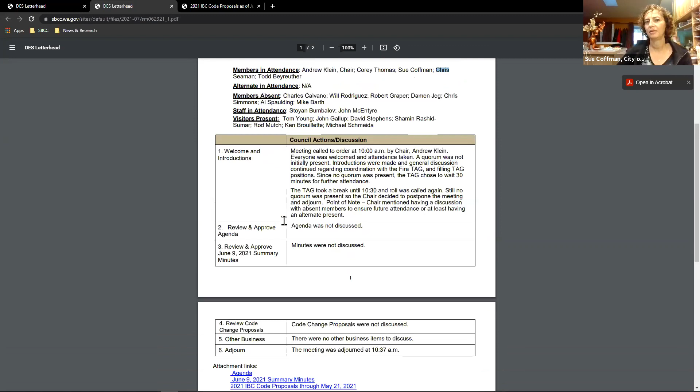Any other mods? I move to accept the meeting minutes with the corrections as noted. Thank you, Sue. I would second. All those in favor, please say aye. Aye. All those opposed? Motion passes.

So now we get into the fun stuff. Todd, you had emailed me about your code change proposal. Do you just have the one down here with the thicknesses for CLT? Yeah, that'd be it, thank you for entertaining it. Okay, yeah, let's do that first, and then we'll go down the list. If you've got specific ones you want to get done earlier or later, even if you're a member of the public, let us know, we can probably be very flexible.

Okay, all right, are you ready, Andrew? Let's have John pull that up. Which one are we starting with? It was 63. GP 1-63.

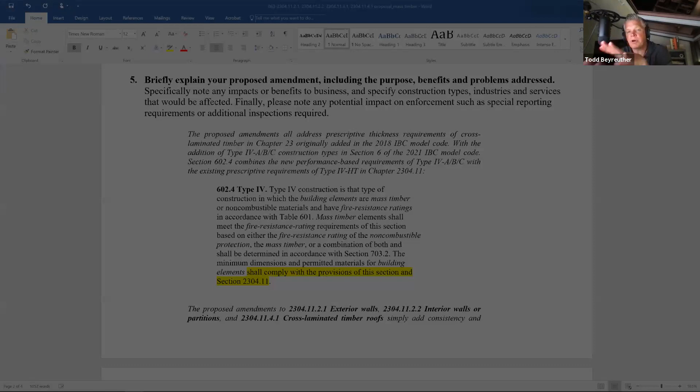Backing up a little bit, the need for this is that, and I've tried to do as much due diligence as I can with members on the ICC, on the tall wood building ad hoc committee, with AWC and other building officials in the state, no one can give good justification or remember why. So if anyone was part of that and has more justification of why this wasn't addressed, the best I can get is that they didn't want to deal with it.

During all the other actions that were taken, members are taken. So the need for this, to get to the point, is that by not allowing down to 3.5 inches, it eliminates common metric sizes of 90 millimeters and 100 millimeters. It also blocks out some other mass timber types, such as nail laminated, dowel laminated, glue laminated, that would use standard 2x4 stock. So I'll stop there if there are any questions or initial comments.

Okay, thank you, Todd.

Todd, this is Chris. The only thing I can think of would be heavy timber. All the types of construction with heavy timber kind of assumed to be 1 hour or so, right? I don't know if you're aware of any fire testing on the nail laminated stuff or the dowel laminated stuff that's 2x4 nominal lumber. Has it been tested? Do we know that it's equivalent-ish?

The short answer is, if we were going to take a technical approach, yes, and it doesn't change performance requirements in Chapter 6, or eliminate the opportunity to—and obviously all these manufacturers are doing their fire testing anyway. That said, the justification proposed here is that it's equivalent to or exceeding what you see in 2304.11.3.2: sawn or glued laminated plank floors, 3 inches nominal in thickness, covered with 1 inch tongue and groove flooring, or 1/2 inch structural panels.

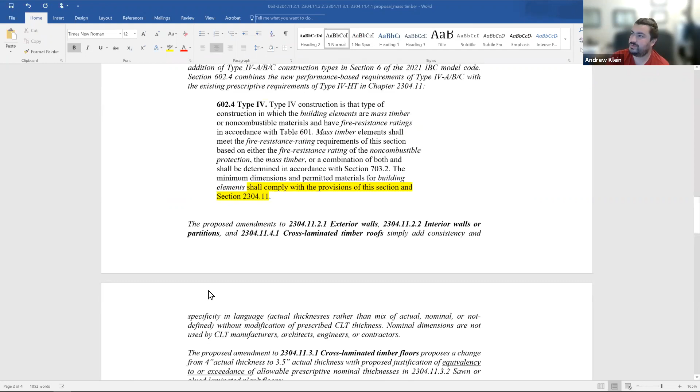Yeah, that's my opinion, but... Okay, that's kind of how I see it as well. So.

And would you like this more liberal, or is this what industry wants it to be? Well, this is coming primarily from my representation on the manufacturing side, that this is blocking out, without further justification of why it's 4 inches actual, a lot of products from both North American and European manufacturers for this requirement that it shall be 4 inches.

Todd, on... sorry, go ahead Chris. Oh, I was going to say that section is specific to cross laminated timber. That one is Mass, absolutely. Yep, and so it wouldn't really impact dowel laminated or nail laminated, correct? Yep, yep, yep, okay. I'm just using that as an example. Oh okay, cool. Yep, cool, but that's absolutely correct, that this section specifically is CLT only.

And Todd, this wouldn't create a situation where only a single manufacturer would have this product, correct? No, not at all. In fact, because right now what it's saying is, and you know how these committees go, right? I wasn't there back when PRG 320, which is the standard, was originally established, but there was 1 or 2 manufacturers, there were lumber people in there. They said, of course it's going to be made out of 2x6s, right? And probably not a lot of consideration for metric sizes, European sizes, or that anyone in North America would take that leap and start cutting rectangles differently from circles.

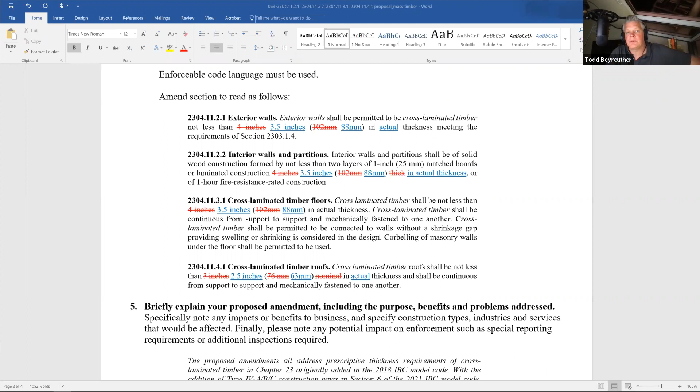Again, if it cleans it up for type 4, A, B, and C that are already given performance requirements, and it doesn't change for the IRC or for type 4 HT, then that's probably fine too.

But Chris, did you want to amend your motion or keep it? Oh, I didn't move anything yet, but I'm ready to, I guess. I don't know, go ahead.

So Todd, what would you prefer, do you think? Would you like to move the 3 forward and not the 1, or would you like to just add a be-open-minded, building-official-friendly note there?

Probably the latter, if those are the two options. Or just whatever the process would be to say we need additional work at the committee level.

I'm okay with whatever Andrew thinks makes sense there, and I'll put whatever that is into words.

Let's punt it for the committee level, Todd. That gives you more time to think about that and come back instead of putting you on the spot. You've got a couple different paths forward there that accomplish what you need, as well as keep some of the conservatism we already have with thicknesses.

Would you be all right with that? Yeah, I just thank you for the discussion. That's really raising the question, and then I'll do some work for the committee.

Okay, so I don't know if we need a motion, John. Well, we will need one—sorry, John, to cut you off—but we need to understand how to file it for the standing committee.

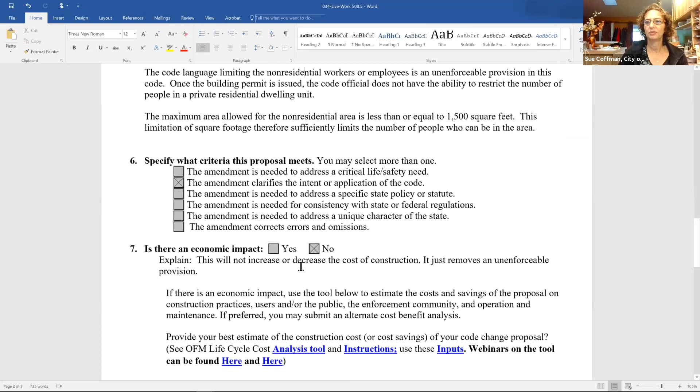Well, again, occupant load is based on square footage, so the restrooms - you could have a cafe for a live-work. There wouldn't be anything preventing you from that. In fact, that's sort of the whole concept of live-work: people used to have their little shops or coffee shops, little restaurants, and they used to live in the upper portion of the unit. So I would say again, there's no need to restrict the number of workers or employees in the code, because there's no way you're going to enforce it anyway.

So you're enforcing it with your square footage. And if the square footage is such that your occupant load is a certain number, based on how the use is, it's calculated based on square footage. Yeah, I guess I was just getting at, if there was a live-work unit and it changes tenants, they don't need to come get a permit from us for a change in occupancy, because it's still just live-work. It's R2. No matter what they do in there, it's still R2.

Not correct. Change in use requires a permit. So if the use was still just R2 retail and I was changing it to a coffee shop, then I would be required - it's not a change of occupancy, but it's a change of use within the occupancy category. So yes, you would need to get a permit. Okay.

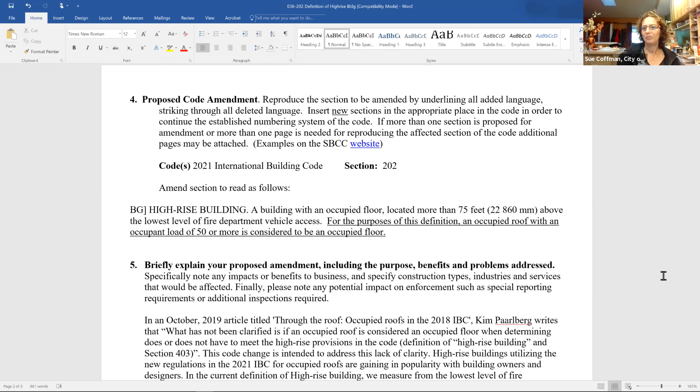There's a lot of proposals in for the 2024 codes at ICC. Some proposals say any kind of occupancy of a roof would trigger you into a high rise if that level was at the high rise level. This one is 50, I think I've seen one like 200. We think this is the Goldilocks number, an occupant load of 50 - it's a reasonable number, not a lot of people up there on the roof. Having 49 people up there would not trigger an occupied floor, which would not make the building a high rise.

So I've got one question just for discussion, and I'll preface it with: I hate slippery slope discussions, so maybe my concern is not valid at all. But one thing, for example, occupied roofs often have an assembly occupancy, for assembly of maybe residents or other occupants of the building. Do you think that this could, and I know that's exempt currently, potentially morph into not allowing the assembly occupancies based on the height tables, if we start counting them as occupied floors?

No, I think, well, a true assembly is going to be an occupant load of 50 or more, so you are triggering yourself into a high rise. Anything less than 50, an assembly type use - like, hey, me and 48 of my friends are going to get up there and have a big party or a small wedding or something like that - that's not going to trigger high rise use because we're less than 50.

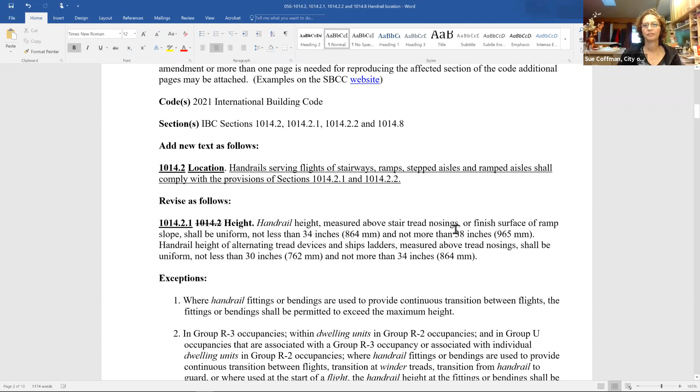I am familiar with it. Okay, do you mind explaining? I'm sorry, I will cut you off, but there is another similar proposal, so if we can have the other one ready too. The other one is, let me see, what number was it? 58, yes. If we need it, is it by Wabo too? Yes, maybe he made some modifications, same intent, just different approach.

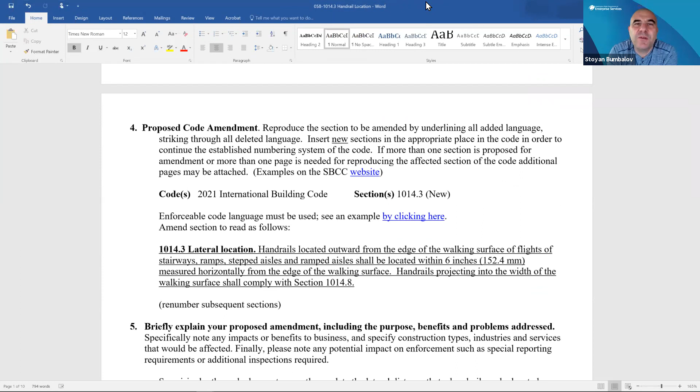Can you guys see that side by side? Yep, we can. Huh, well...

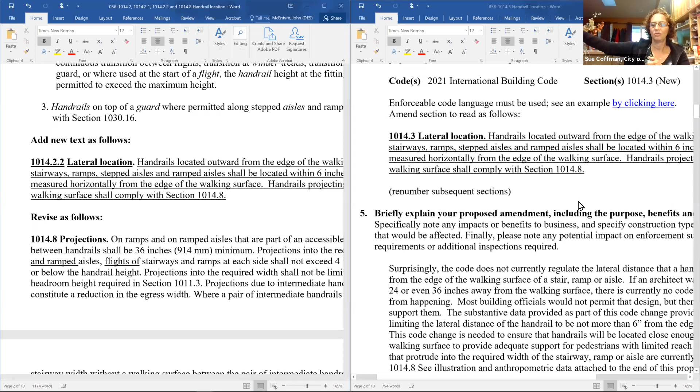I know about the proposal with Lee for the lateral location. It's actually a good proposal because while there are requirements height-wise and such for the handrail, there aren't any for how far away the handrail can be. There was a situation where Lee had a project with some sort of skateboard channel alongside the stair, and the handrail ended up on the outside of that. He had pictures of John and Sue's granddaughter and other people trying to reach really far to grab a handrail that was too far away. So they're trying to put in a requirement that the handrail cannot be too far away from you laterally.

Sue, is there anything in the ANSI standard that would already require it to be within a certain reach range? I am not sure about that.

I don't think so. In my understanding, when Lee spoke on this briefly, he explained the situation, Sue, and said that the builder basically said, well, show me in the code where I have to change it. And there's nothing there. So, a picture speaks 1,000 words.

I mean, you see this little girl trying to reach way over to grab this handrail that's on the other side of this section where they wanted some sort of, I don't know, skateboarders can skate down this. So it's between the stair and where the actual handrail is, and somebody has to reach way over to grab it. And apparently there isn't anything in the code. It seems very odd. There should be something in the code that says the handrail has to be within a certain distance of the actual edge of the stair.

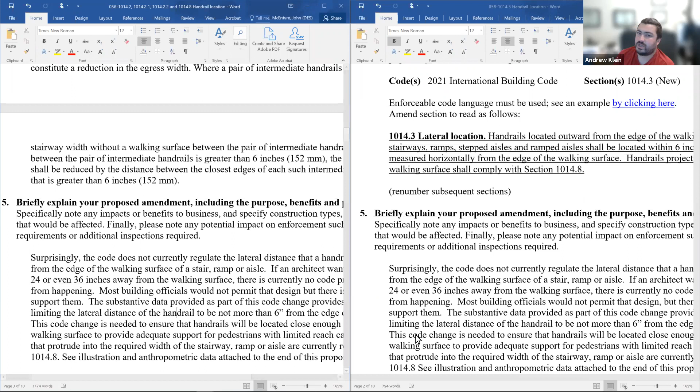Any comments, any unintended consequences you can see from this? Just curious, does that have anything to do with intermediate handrails? Would that affect that at all? I wouldn't think so. This is handrails located outward from the edge of the walking surface, so it's pretty clear that it's on the edge of the stairs. It's not intended to restrict where those intermediate handrails are - I think it's more specific.

If I recall, there was - I don't know if it was a WABO meeting or what - but somebody had some pictures. I thought it was a stairway somewhere in Europe where they had like a 12 to 18 inch wide ramp type thing on the stair at the edge for people to roll their bicycles up as they walked up the stairs. And what it did is it pushed the handrail 18 inches away from the stairs, which made it essentially useless unless you were walking on that too-steep ramp at that point.

Well, and again, if you have somebody with any kind of disability trying to stretch their arm out to grab a handrail across some section, it just - it looks like, for smaller stature people or children, for people with disabilities - I mean, if you have a long wingspan, maybe it's not that big of a deal, but if you're smaller in stature, it just doesn't make sense for the handrail to be so far away.

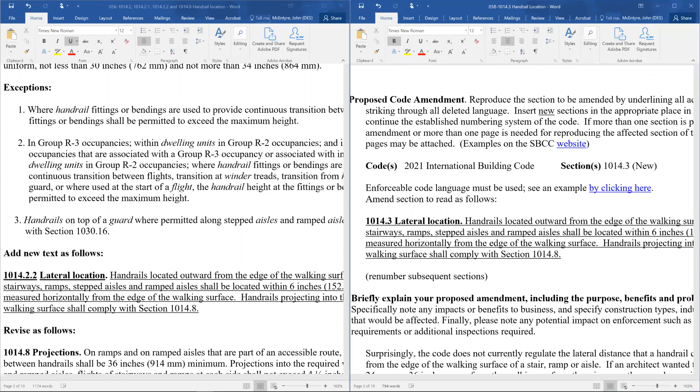I think for the sake of discussion, I prefer the way that the CWA one came in from Rich, just from a numbering standpoint. I liked that it's just a new section instead of a new subsection. Oh, yeah, maybe that was what he just put in a different format. Yeah, it just seems cleaner from a formatting standpoint.

Is it the exact language? Well, the first one on the screen has a second section with the projections, which I don't believe the other one does. Is that correct? That's correct. That's the separate cleanup, it seems to me. Yeah, I'm not worried about that. Rich might have been working with Lee on this and probably submitted it as a cleanup to help him out.

Yeah, and I think we could even view it that way. I think we could accept Lee's, and then essentially accept both of them with Richard's numbering sequence, because I agree with Richard's on that - in 1014.2 that's specific to height, and we're not really talking about height. We're talking about that lateral location, which really does seem to warrant its inclusion as another subgroup, along with graspability, continuity, fittings, extensions, and so forth.

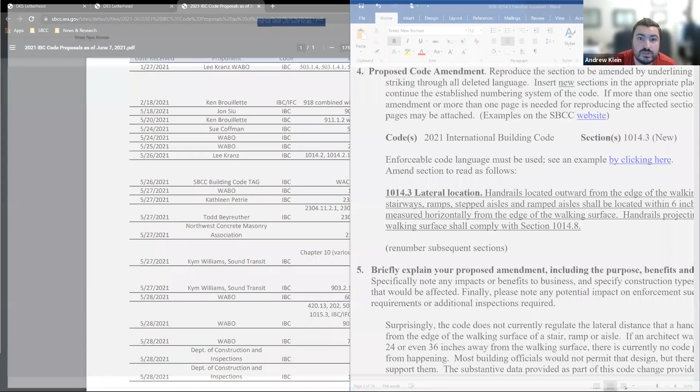So let's see, 62. Used sawn lumber. And Kathleen Petrie.

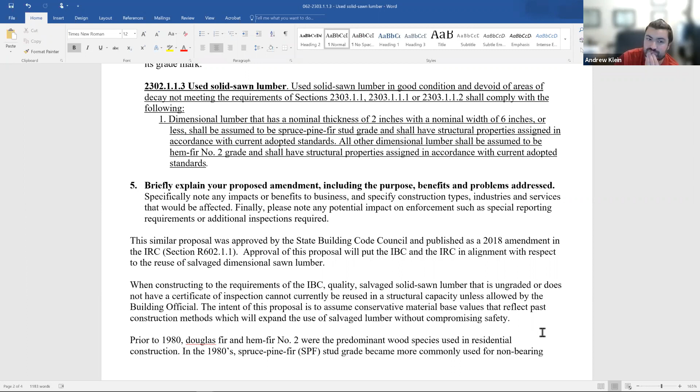Is the intent of this to make sure we're not making assumptions that the wood is stronger than it is? Is that what the intent is? It's what it looks like to me. Okay, so it's to help people like me who aren't SEs understand what I should guess it is. Right.

I think it makes sense maybe to have an exception, since a lot of commercial construction will have an SE in it. You'd have the performance-based approach there that's stamped. So that's why I said it makes sense in the IRC because it's prescriptive.

Does it make sense in the IBC? Well, I would say, my opinion, yes, because there are a lot of prescriptive requirements in the IBC. And there are big projects that don't need that, but there are a lot of very small commercial projects that could benefit from this. So it's a sustainability type amendment, so I'm supportive of that.

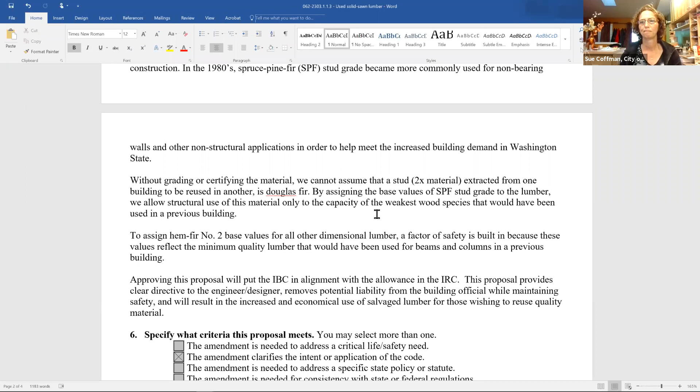Okay, I'll just play devil's advocate once. I don't want to spend too long on simple things, but from the sustainability point of view, you could over-design too, putting up more wood, which I guess is a carbon sink. So maybe that's good.

Could we easily throw an exception in there that said wood that has been graded by, I don't know what the proper term is for it, but somebody comes out and says, this is what it is. Yeah, I like that. And Todd may know when he jumps back on. He had a meeting from 11 to 12. But yeah, it looks to me like it could use an exception.

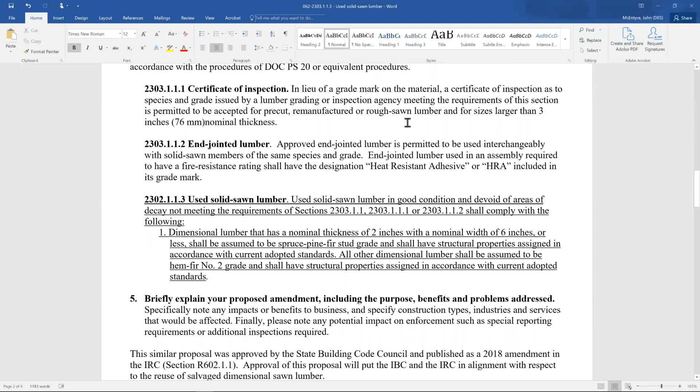But yeah, let's, or it's a... number 2 there: comply with one of the following. 1, it's assumed to be junk. 2, it gets graded by somebody and it's good. Oh, I like that approach.

So could that be forwarded? Could this be accepted and then added as an amendment and then forwarded on? Yeah. Andrew, do we need the approval of specific language, or can we do it in just the intent of what we want to say? No, let's do it with the intent to keep everything moving along. Cool. So then if you're ready, I can put something together, I suppose. Yep, go for it, Chris.

Thank you. Okay, I move to bring this proposal to the BFP with the following amendments: insert item number 2, some kind of statement regarding grading by a professional. I'll second that. All right, thank you. And then as a friendly amendment, it will say comply with one of the following, which you had said earlier. Yep.

You want me to put the specific language in here now, or is that something you want? I think we don't necessarily know what the proper standard to which it would be graded is. So we'll need a little time to look into that. Yes, sir. Okay.

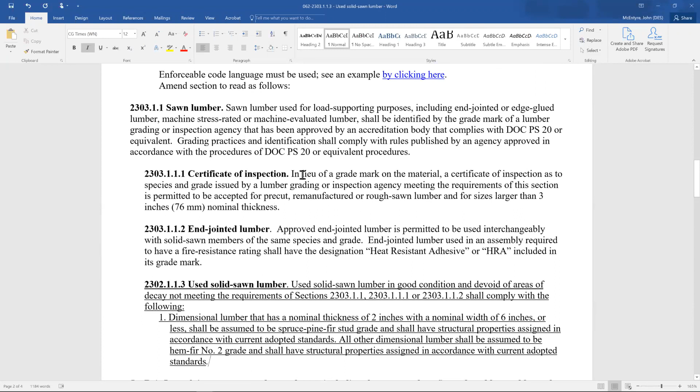All right, then I guess I would say it doesn't make sense for there to be a list then, because there's only one thing on the list. Does that sound like good code language? You don't actually have a list of one thing. That's very true.

So my modification would be to strike everything after 2303.1.1.2, beginning with 'shall comply.' Strike all this above, we're going to figure out how to just make that part of the statement.

So it's going to be 2303.1.1.2, and then it'll be... you're saying you don't need 'used solid lumber.' I mean, you would just say 'used solid sawn,' delete the rest, 'dimensional lumber in good condition and devoid of areas of decay,' that has, you know, a nominal thickness, blah, blah, blah.

Yeah, I think you've got it, Sue. I'll let Sue go ahead and do it. So, under the 'used solid sawn lumber' title, keep that, and then say 'used solid sawn dimensional lumber,' add 'dimensional' in front of 'lumber,' in good condition, devoid of areas of decay, so keep all that.

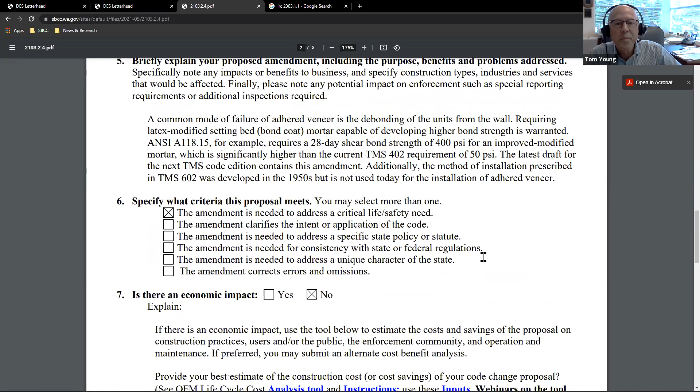And we have another technical expert online if you'd like to hear a little more about the background of this or the products that are available. Okay, thank you, Tom. I'll let other folks decide if they need more information or have any questions. And public too, if you have any additional comments or concerns, please speak up. And I'd entertain a motion as well.

Point of order, I just saw something that we missed when we were accepting the proposals. Under item 7, is there an economic impact? It's shown no, but there is no explanation why it's no. So if the proponent can share the opinion now and send us something that we can add to the document, I would really appreciate it. Usually we needed to catch this upfront, but we didn't. Okay, thank you sir. Tom.

Yeah, let me address it briefly, then I'm going to call on John Gallup with Laticrete. So the mortars themselves will cost somewhat more, and John can speak to that point. I will be happy to. I didn't realize with 'no' you needed an explanation, but I'd be happy to provide that. But where the savings will come is on the labor side, and that's why I indicated that the combination of the labor savings with the increased cost of material would balance out. But John, do you want to add to that?

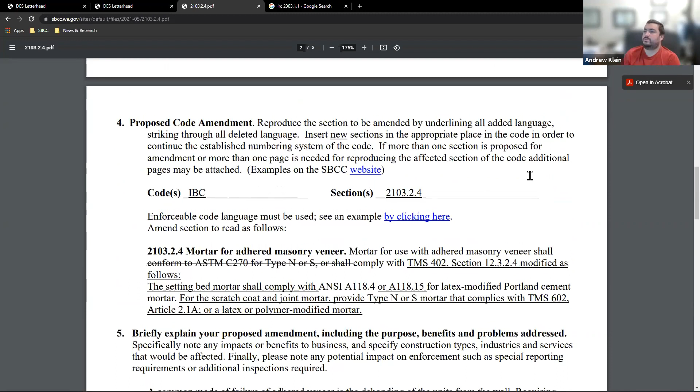Thank you, John. I had a question for you, John. Are you talking about the setting bed? It seems to me like that would be the initial coat rather than the bonding bed. Is that two different things?

It is, Mark. Thank you for the question. So the setting bed can continue to be either a Type S or Type N mortar as the setting bed that encapsulates, let's say, a 2.5 pound per square yard diamond metal lath in a conventional lath scratch assembly. The linchpin to that assembly, however, is the bond coat, and that's where we're seeing the failure.

So we can still bond to a Type S, Type N based lath scratch system, provided we're using as that bonding mortar, the glue if you will, A118.4, A118.15 material. That's going to be the difference between success and failure. So yes, in answer to your question, those are two different components of the assembly.

We do, and I think there's an item here in the proposal. We do see latex Portland modified engineered bedding mortars being provided by a range of manufacturers, but we still see a high degree of Type S, particularly Type S mortar, not so much Type N, as the bedding mortar.

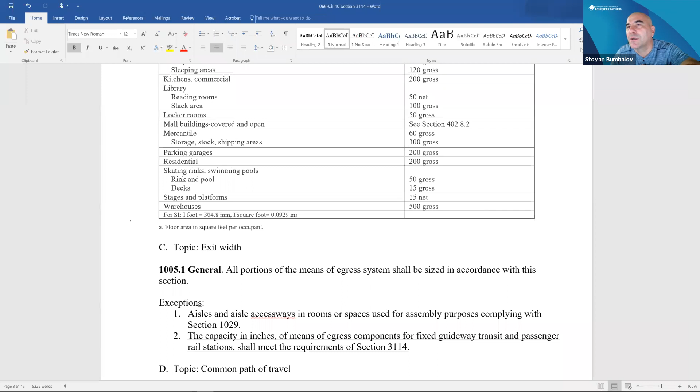Okay, so what is your recommendation? And I assume that 67 is the same, so 66 and 67 together, or is that not the case? I don't think it was the case, but let me check. There is another proposal, I think it was Lee Krantz, but I need to check it. 67, I'll pull that one up just to look at it. 66 and 67 are the same proponent.

So I mean, it's up to you, Andrew, if you want to spend the time now, or we can target the rest of the proposals and leave this. I don't have a preference. Yeah, let's target the rest and leave this. So

Are you in agreement that we should put together a separate group to take a look at this? Well, only the council can do that, but the TAC can recommend it. Okay, let's make that recommendation. If people are okay with that, do we need a vote for that? Yes. Okay, well, we can do something else.

So when we get to this proposal, when the TAC members start discussing it, we can make the recommendation for the council. Let's go over it one more time. I'm not familiar with the proposal itself. I just had a discussion with Lee Kranz, and he suggested that this is a difficult proposal to discuss, and it exceeds my knowledge. So I cannot recommend anything right now based on the technical requirements in this proposal. Okay.

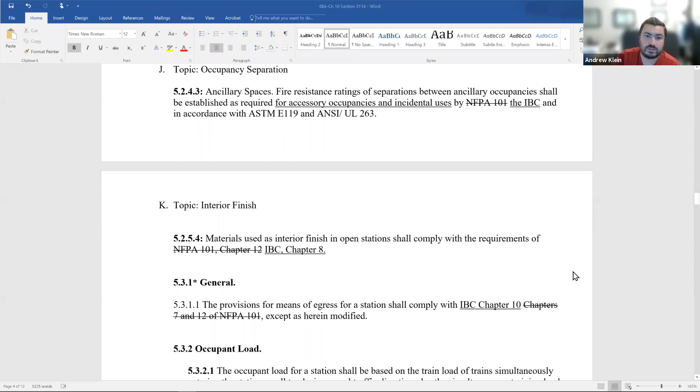So, okay, let's move on then to 73. And it looks like Todd's back, correct? Okay, I asked him a little later too. He's back on, but maybe he's still on his other meeting.

All right, so from John Sue. And Sue, are you familiar with this, having worked with John, or should we go through it together? I'm somewhat familiar, but not quite as familiar. Okay, well, let's just run through it together. Okay, sounds good.

Any questions or comments? And any comments or questions from members of the public? As a rule of thumb, the public is free to speak up at any time, except after a motion is made and being voted on.

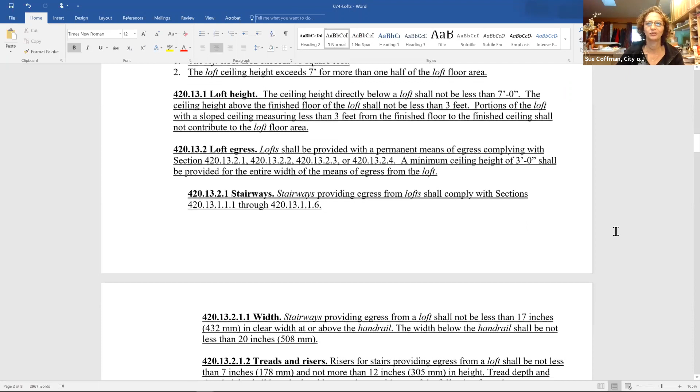This is actually a proposal that they've done some other modifications since then with WABO, as they're working on a simultaneous proposal for the 2024 codes. It's a little bit different now than when John originally submitted it.

I would propose that the more modified version be looked at. I don't know if it's a good proposal overall, but there's been quite a bit of other work done. I think this one was submitted a little bit before all that other work, and we got some input from ICC committee members.

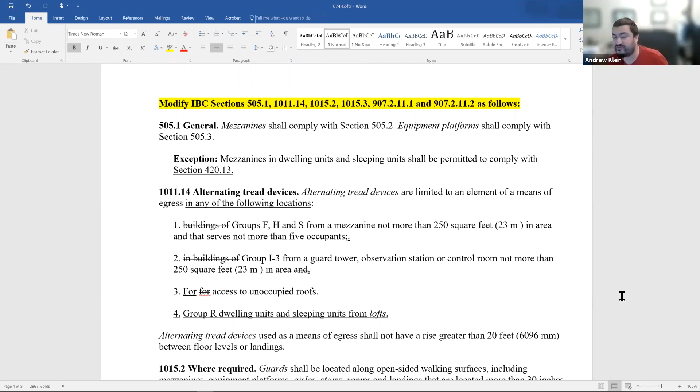So what would be your recommendation to move forward? I do like the idea of the loft being in there, so you don't have to use mezzanine requirements. Right, it got modified so that it's a sleeping loft, similar to, you know, not an overall loft.

So I would recommend that they submit the updated version of this, because it's pretty good. I don't know how you can do that. We definitely want to move this proposal forward, but I think there are some better modifications that happened between when it was submitted and now that would be really good to have incorporated.

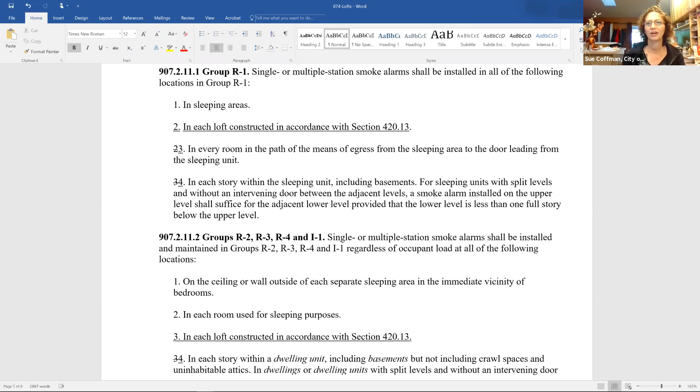Okay John, do we need to make a motion, or can we just leave this here to come back to? We can table it for the next meeting.

The other thing I want to say for the TAC members: there is a section for lofts in the residential code, R327, and there's also Appendix Q, tiny homes, which has a section for lofts. I assume this will be reviewed for the residential code because we don't want it in two places, and the appendix is adopted by the council so we have different requirements. They are very close, but there are some differences. And now in the building code, we have another one.

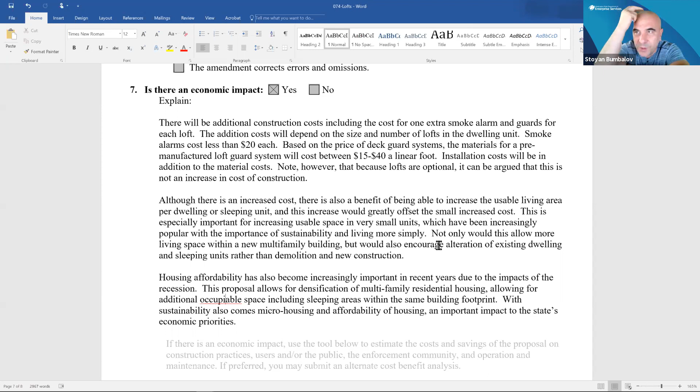I can provide a little background on that. What they're looking at is a lot of these commercial multifamily buildings want to densify development, and they don't meet the full requirements for a mezzanine. So a lot of times they just want to, maybe they've got some tall ceilings, and they want to put a little sleeping loft above the bathroom or the kitchen.

There are some of these areas that it would be great to allow them to use for residential, but we want it done safely, because sometimes they're just using them without proper safeguards. So you'd get smoke detectors up there, guards put in, some sort of permanent means of egress. We're allowing this for areas not meeting the 7-foot ceiling height, but they want to be able to use these for useful space.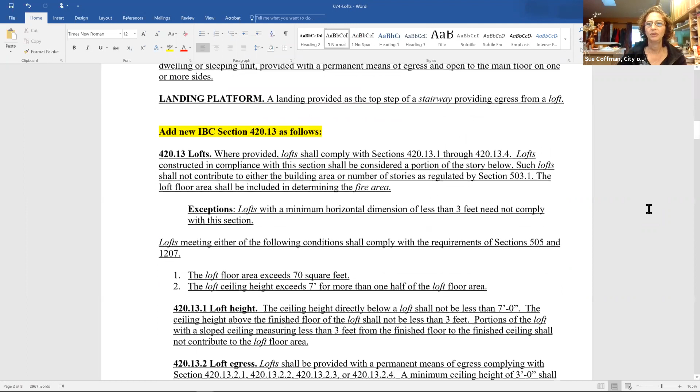Again, this is a sustainable type of amendment. It densifies the development, supports affordable housing, gets more housing in one unit. So it's really a good proposal, and again they're working on an ICC version. They got this one in, but we've done some additional work in between. There are some changes, and I think those changes would be really beneficial, so it would be good to just push it off.

Does the applicant submit a new version, or how do they submit an updated version of this? It will be a revised proposal. Oh okay, I'll talk to John about that. Thank you, thank you, Sue.

Stoyan, do we make a motion to table, or can it just be tabled? No, we'll get back to it the next meeting in 2 weeks. Perfect, okay. So 77, secondary attachments to structural members.

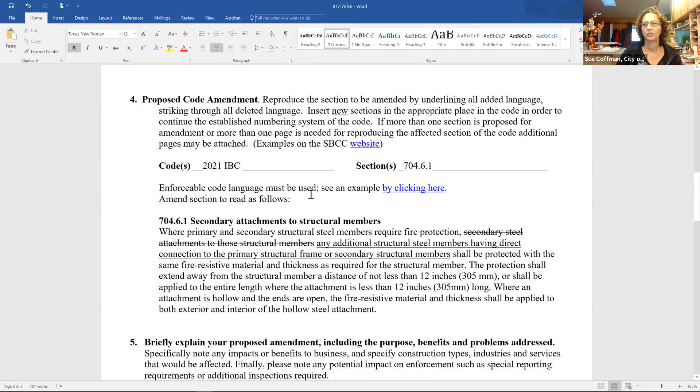Yeah, I think this is just another WABO proposal, making sure structural secondary attachments have the same requirement as where primary and secondary steel members require fire protection. Any additional structural steel having direct connection requires that connection. Sometimes it's hard to say what is secondary steel attachment, so they're just trying to clarify the language. This is saying any attachment would have to have the same fire resistance rating as the more stringent one, even if just because it's attached to it.

Andrew, I think I've discussed this with somebody, maybe it was in the fire tag. What I recall from the discussion is that it's a heat sink if it's attached to that structural member. So if you have that primary structural member and other attachments to it, whatever's attaching to it is kind of a heat sink, and that was the concern there.

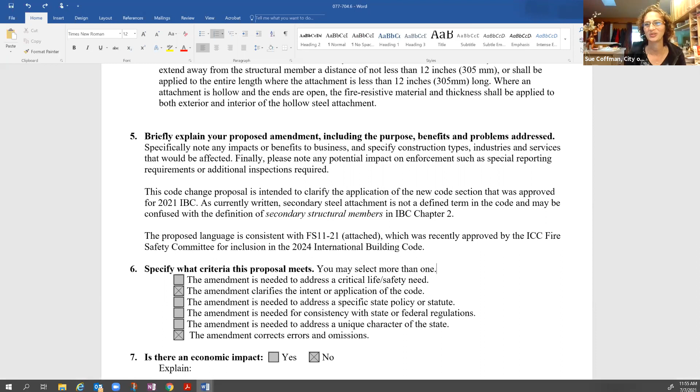A lot of these proposals we're looking at are things being proposed for the 2024 code. But it's good if we think it's reasonable and the state wants to start using this requirement, then we get to test it out a little bit and see if it is reasonable.

Any additional questions or comments from committee members or members of the public? Would anyone like to make a motion?

This is Chris, I'd move to forward it to the BFP as submitted. All right, thanks Chris. I'll second. Thank you, Sue. Any further discussion? All those in favor, please say aye. Aye, aye, aye. All those opposed? Motion passes, thank you.

What's up next? Number 80, materials used in firewalls. Micah.

Micah's not on, is he? Is there a WABO meeting going on right now? Is that why you don't have some of them? I don't know for sure. Yeah, I thought they would be here. I'm not aware of one.

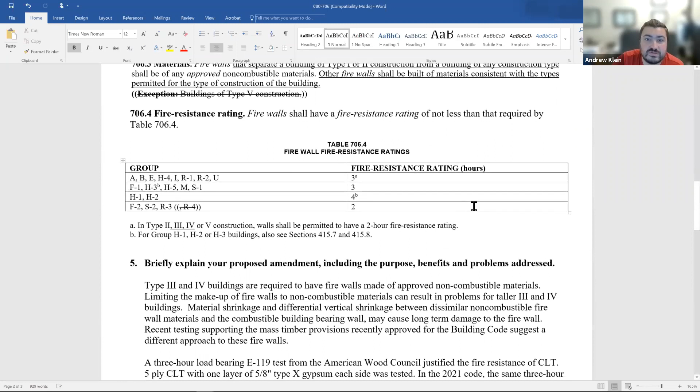I think this is just to clarify consistency of the code for mass timber. Adding, and then deleting the R4 because we don't have that in the groups. And then again, adding.

Type 3 and 4 are required to have firewalls. Limiting the makeup of firewalls to non-combustible can result in problems for the taller type 3 and 4 buildings. So it provides some consistency for mass timber buildings. Okay, so it actually opens up the code to more options.

Correct, and it would open up to type 3 buildings also. I think somebody has their hand up, Shamim. Yes, we have a hand raised. Please go ahead, Shamim. Yes, hi, can you hear me okay? Yep, we can. And please correct my pronunciation if I mispronounced it. No problem, it's Shamim Rashid Sumwa, and I'm representing the National Ready Mixed Concrete Association.

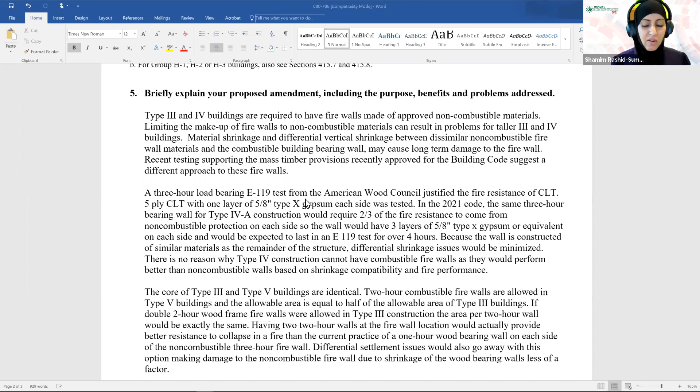As a member of the general public, I wanted to share some perspective on this proposal. There was a proposal with similar intent introduced as part of the ICC Group A codes development, the recent committee action hearings. What this is doing is permitting firewalls to be constructed of primarily combustible materials in types 3 and 4 construction. The committee actually disapproved this proposal. Their decision was that there was some uncertainty regarding performance of mass timber as a firewall, and they chose to be careful rather than permit combustible construction as an allowance for type 3 and type 4 construction. So although there have been some tests completed, the testimony showed there was some difference between the fire resistance testing done for protection of mass timber construction versus the structural fire performance required for firewalls, such as building separation assemblies, to allow buildings to be considered separate and distinct from one another. We would recommend similar caution as the committee found in the ICC process, and ask that you reconsider to continue to maintain that firewalls be constructed of non-combustible materials.

Thank you. Any other comments or questions from members of the public or committee members?

Yes, Mr. Chair, Tom Young, Northwest Concrete Masonry Association. I would support Shamim's comments. It is a pretty major change. We're redefining firewalls that now only approve use of non-combustible materials, allowing these exceptions to that definition. So it seems like a fairly major change to me. And it seems like one of the main reasons for doing this is difficulty with controlling shrinkage in dissimilar materials, but that can certainly be done through proper detailing. I don't really see that as a reason for reducing the fire resistance of firewalls.

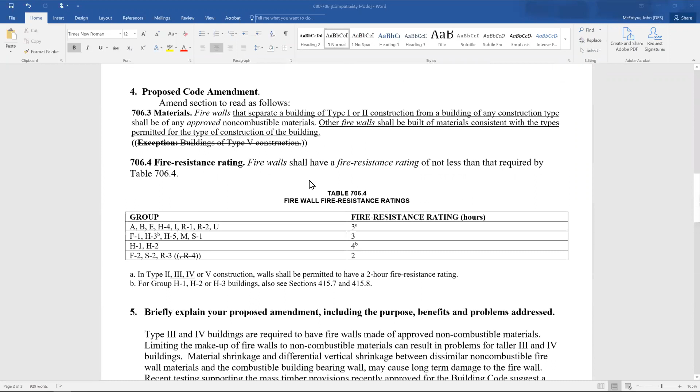Thank you, Tom. Any other comments or questions? This is Chris. Does anyone happen to know the filing number of that proposal at the ICC hearings, so we could see how that went?

Yeah, we have that. Shamim, if I'm right, it's FS 31-21. Yes, that's what I have noted as well. And that was from, right, FS 31-21. And it was disapproved on a vote of 8-5. Any other questions or comments?

My personal feeling is that materials should be consistent with the type of permitted construction. So I lean toward a firewall being a firewall, but that's just my thought, especially seeing it the first time here. Type 3 would typically have a non-combustible exterior wall. A firewall is not an exterior wall, but I would be hesitant to move too quickly. I would like to hear more from the proponent on it.

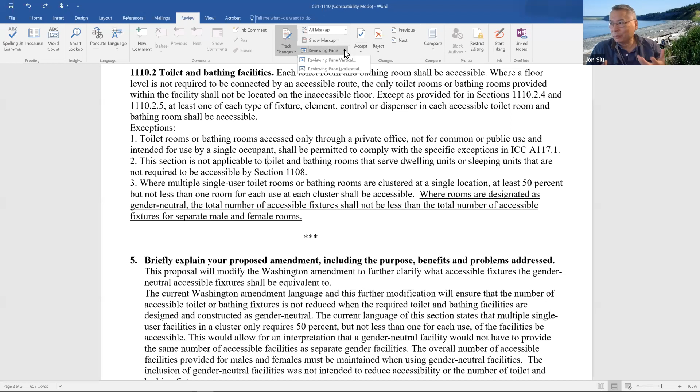Wouldn't this sentence make more sense - instead of attaching this to exception 3 - shouldn't this be the last sentence of the charging paragraph? Then it solves that because you're not limiting it to single user toilet rooms, and you're not affecting the clustering situation.

Well, this is talking about the fixture types inside the restrooms. So how would you - can you give us an example of the language? It would apply more broadly, essentially everywhere, that regardless of your restroom situation, you don't reduce the number of accessible fixtures than you would have had.

And if that new sentence was just at the end of 1110.2 - dispenser in each accessible toilet room and bathing room shall be accessible, period. Where rooms are designated as gender neutral, the total number of accessible fixtures shall not be less than the total number, yada yada, period. And then exceptions 1, 2, 3. What do you think of that, John?

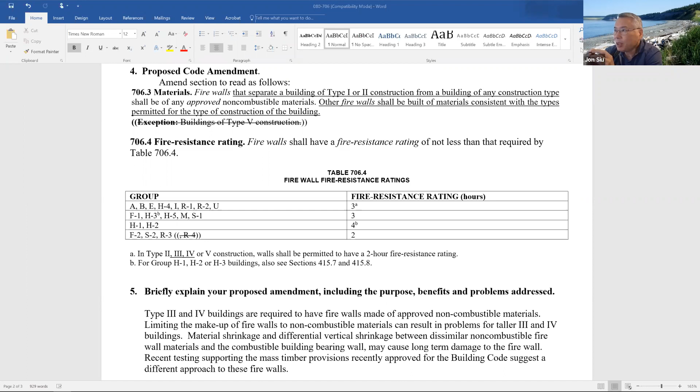The difficulty you get into structurally is the difference in materials. If you have a firewall that's a different material running up to, in our case, could be as much as a 6-story wood frame building, there's differential shrinkage going on. So your wood frame is going to shrink differently than the concrete, or whatever steel is in the firewall. And so we've decided that's not a good thing to happen either.

We've been doing this — well, I shouldn't say we anymore, but Seattle has been doing this for a very long time, going all the way back to essentially area separation walls in the UBC days, where there was no limitation on this. Seattle amended the code some time ago to allow these. In fact, I will admit that at some point when we switched from UBC to IBC, we totally missed that this change was made, so we were going ahead and enforcing just wood frame anyway.

We believe it's a reasonable thing to do. It's better for seismic, and again, as we say, better for differential shrinkage. So those are the main reasons I think we're submitting this one. Thank you, Jon.

So I guess we could make a motion on this. Shamim, you're still on if you wanted to make any comments. I know Tom Young looks like — oh, here's Tom. Yeah, if either of you wanted to have anything to say, we can keep it tabled or we can make a motion. I'm fine with either.

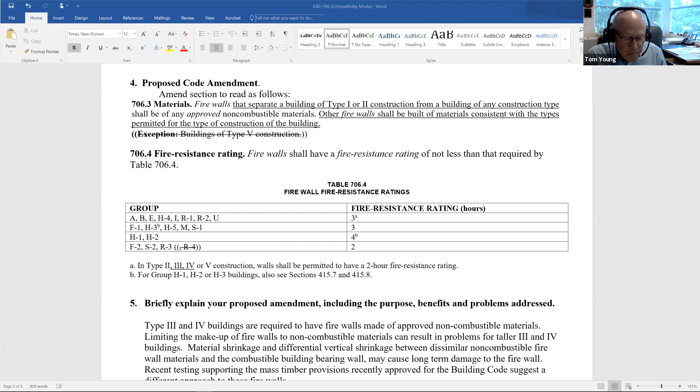That's the whole thing with the difference between non-combustible and combustible materials — you're not adding that much to the fire load in the building. So I think that's not necessary, I guess. But you are changing the definition of firewalls from non-combustible to something other than that. That seems to be a big change.

I would add to what Tom is mentioning, that was the primary concern of the ICC technical committee: this has not been permitted for the full history of the International Building Code, even if it may have been permitted under one or more legacy codes. They were very concerned about not necessarily maintaining fire resistance, but structural performance as a firewall. Firewalls are not only used to separate areas, but also to separate buildings into two separate and distinct buildings, so there's a performance requirement beyond fire resistance to maintain structural integrity as a separation. There was another proposal to allow type 3 and 4 construction as a horizontal separation, and that was also disapproved by the technical committee. So Tom and I wanted to share that information, as well as our opposition to introducing combustible material into firewall construction. Thank you.

Any other comments? I will give an opportunity if anyone wants to make a motion, they can, but there's no reason to since we previously decided to table it. I'll give 10 seconds if anyone wants to make a motion.

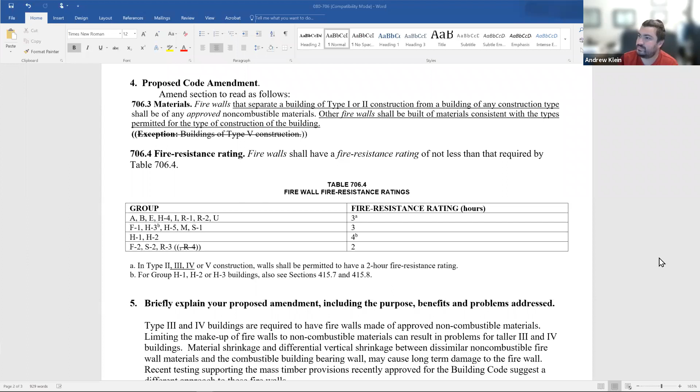Thank you, Sue. Is there a second? I'll second. Todd. Thank you, Todd. Any further discussion? All those in favor, please say aye. Aye. All those opposed? Motion passes. Again, this is to move it forward to the BFP committee, so we'll continue to discuss that. Thank you.

Let's see, next up, I think we're on 82 - we've got a bunch of WABOs here. Horizontal building separation allowance.

Can you scroll down a little bit more, Jon? So, okay, there we go. The building or buildings above a horizontal assembly shall be permitted to have group A, B, M, R, or S occupancies. So we're taking out the requirement that each Group A occupancy have an occupant load of less than 300. That's correct.

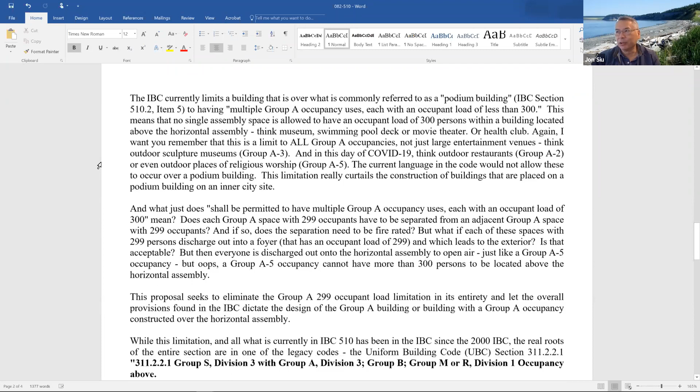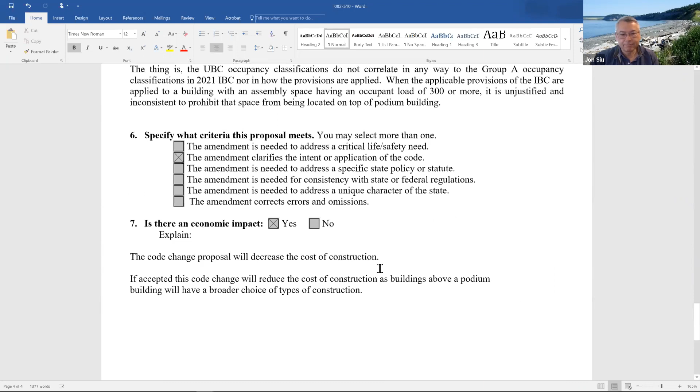Okay, discussion. Questions? That 300 number is a legacy code thing - it goes back to before they changed the occupancy types. There used to be an A3, which was less than 300, and A2.1 assemblies, which were 300 or more. Back in the old days, this was limited to A3 occupancies. Again, what we've seen is just an expansion of that. These things are in separate buildings, so I think the feeling was these are safe - that's the main thing, we haven't had any issues with them. Personally, I'm a proponent of things that open up the code when you're not seeing any safety issues. Any other questions or discussion? And members of the public too, please feel free to speak up.

I have a comment. Currently we have a state amendment in this section, so the language as proposed needs to be modified. What is proposed here doesn't include the Washington Amendment, which is currently in 2018. This is based on the model code only.

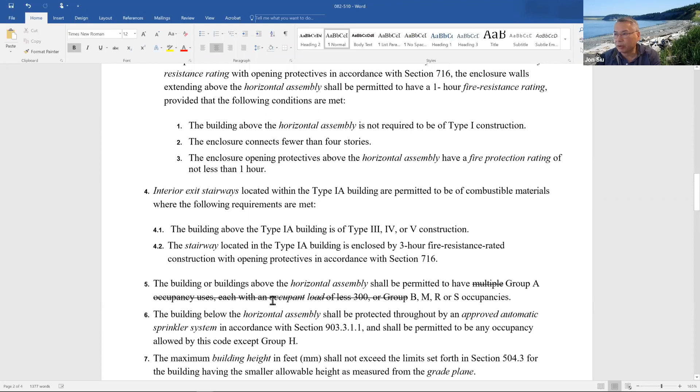Is that easy enough to merge together that staff can do, or did you want - Jon, are you the proponent of this one? Staff can do that, it depends if the proponent wants to include this. I don't know how this proposal was evaluated - did it include the local amendment or not? This is another one of Micah's, so I don't know if he considered that. Let me write myself a note, because it's probably another one we need to take a look at.

Yeah, I'm sure he was basing it purely on the 2021 language. The state amendment adds after group B, there is a comma, and it adds group I1, condition 2, licensed care facilities, R or S occupancies - should definitely keep that. So if staff can do that, that would be great. Thank you, Stoyan. So yeah, that seems like a simple correlation.

I'd be happy to make a motion to that effect as well. Thank you, Al. Is that clear? We're moving it forward with staff putting in the state amendment. Is there a second? A second, thank you, Sue. Any further discussion?

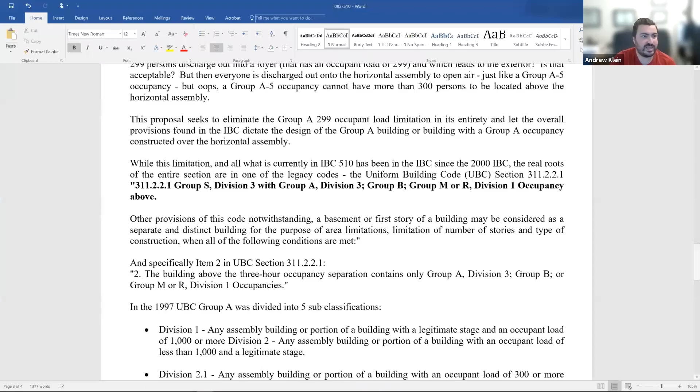All those in favor, please say aye. Aye. Anyone opposed? Motion passes. So now we're up with concealed spaces.

Yeah, this is another one that was proposed at ICC. Unfortunately, I need to go back and look and see what was the result, but I believe this one did pass.

Is there anything in NFPA 13 that this would not be required? You know, because NFPA has its own exceptions. This is specifically for mass timber, so yes, this is part of the whole TWB process, and part of the compromises that were made.

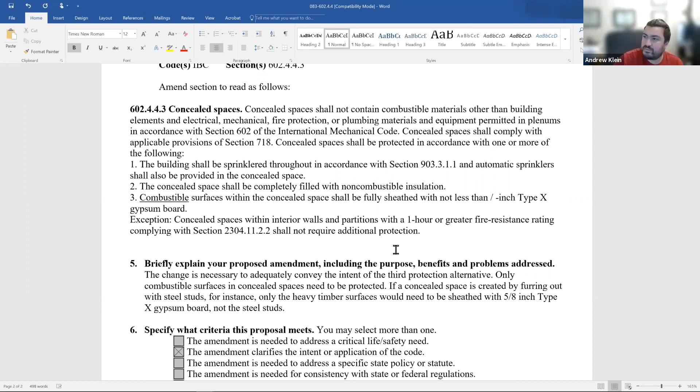Okay, any questions or comments from committee members or members of the public? I think, if relevant, more specifically it's for type 4 HT, is that correct? It's not type 4 ABC, just to clarify.

This particular one, I'd have to check again. I'm sorry, I'm not quite prepared for this. It looks like type 4C to me, I think. Yeah, I could be wrong. This was the separate AWC proposal that was not part of the ad hoc committee, to my understanding. Many people would like to see this in type 4C, but I'm not sure it's relevant to our discussion. Based on 602.4.4, it'd be limited to type 4 heavy timber.

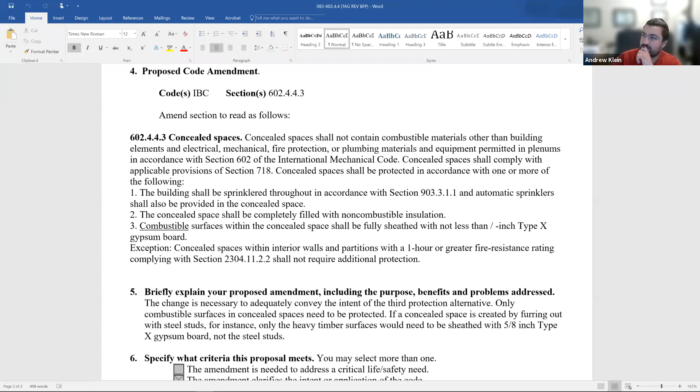All right, any additional questions or comments? Anyone want to make a motion? I would make a motion to approve as submitted. Thank you, Al. Second, thank you Mike and Todd. Any further discussion? All those in favor, please say aye. Aye, aye. All those opposed, please say nay. Motion passes.

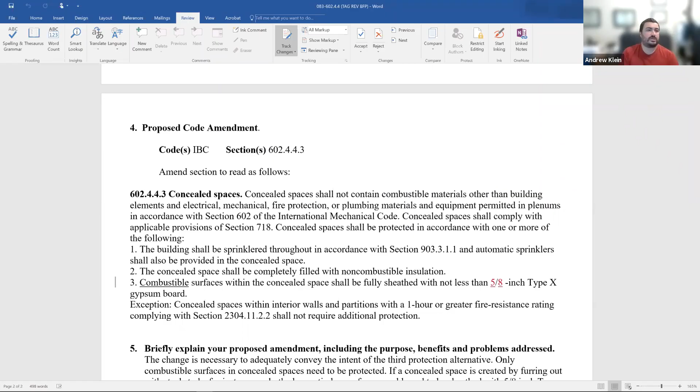All right, let's move on to dwelling unit size. In fact, out in my neck of the woods, one of the Tri-Cities was dealing with that on a municipal level. We had an old, I think it was a Holiday Inn, that a developer wanted to turn into micro units.

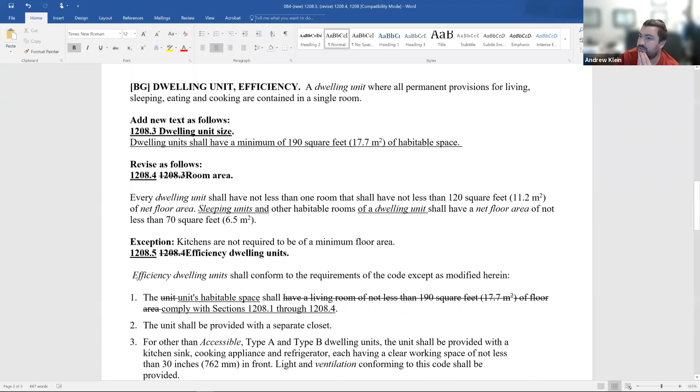So new text: dwelling units shall have a minimum of 190 square feet of habitable space. I believe currently, correct me if I'm wrong, the building code itself doesn't have these requirements. I know a lot of municipal codes may. Is there a minimum? This is just trying to equilibrate between efficiency dwelling units and minimum sizes for efficiency dwelling units versus regular dwelling units. You add the two minimums together, I think you had like 190 square feet or something like that before. I'd have to look at the specific codes, but yeah, it standardizes the minimum sizes for all dwelling units.

So you could potentially- how the code was before, you could have a 1-bedroom unit that was actually smaller than an efficiency dwelling unit. Because if you put a wall in there and called it a 1-bedroom unit, it could actually be smaller than the minimum size for an efficiency dwelling unit. Makes sense to me.

Any questions or comments? John, do you mind scrolling up? Okay, it would decrease the cost of construction, it says. Yeah, I can scroll down to the, yeah, there.

I think that's a little misleading. I think we are trying to close a loophole. Ultimately, it could - if you get a 1-bedroom, you're required to bump up the size. That's what we're kind of saying. We're closing a loophole and being more generous to efficiency dwelling units at the same time.

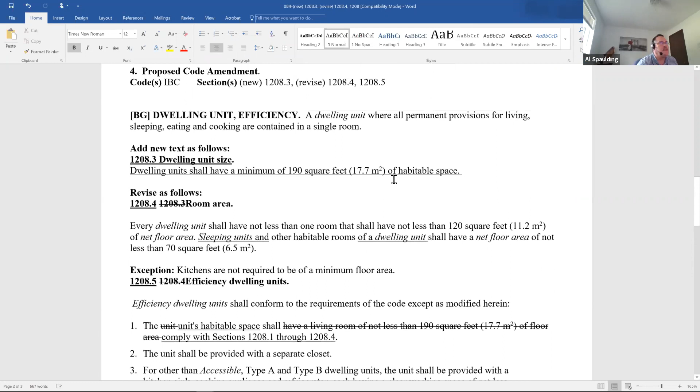So, any further discussion or questions? Members of the public? This is Al. I'm curious - these wouldn't be confused as a dwelling unit or sleeping unit in a licensed healthcare facility, would it? That has a different connotation, correct? Different application - yeah, we're talking about dwelling units here. Your sleeping units are covered separately.

Well, I guess from that perspective, I'm probably okay. There likely would be DSHS licensed healthcare facilities that might have more stringent requirements than these minimums, and I think we would defer to the licensing chapter in that case. That's a good point, Al. Not more stringent, but bigger maybe than what this calls for.

Are you talking about from the perspective of accessibility, like assisted living facilities in particular? You could potentially have an assisted living facility in an efficiency dwelling unit, right? In which case this requirement would already have been there. Yeah, this is just making it the same so that you can't put a wall across the kitchen and say, well, now I have a 1-bedroom apartment instead of an efficiency dwelling unit, and now I'm going to make it smaller.

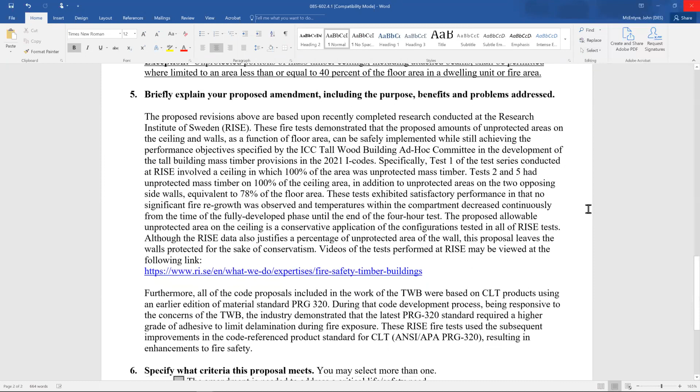So, discussion, questions? How does this fit in with the type 4 ABC covering up the stuff? Is this a separate requirement? This is type 4A, right? Okay, so which would normally cover everything? Yeah, let me make sure of that though. So what, sorry, can we scroll up a little bit to see the actual language? 602.4.1.2 is going to be limited to type 4. 4A, that's type 4A.

We have a hand up. Oh yep, go ahead, Shamim. And feel free to just speak up too, you don't have to be so formal. Sure, thank you. Yeah, this is actually a proposal for allowing unprotected ceilings in type 4A construction.

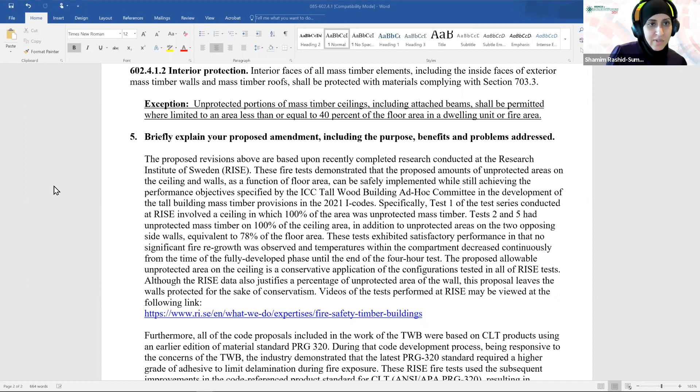This was also a proposal introduced as part of the ICC Group A codes development earlier this year. There were a number of concerns. Type 4A was intended by the ad hoc committee on tall wood buildings initially to have exactly identical fire resistance ratings as type 1A construction, which is obviously fire resistive, non-combustible. So type 4A construction was developed to be fully encapsulated, where all of the interior faces of the mass timber are protected and not exposed. So you would have now with this exception, significant portions of the ceiling which would be exposed.

So the technical committee did disapprove this. They felt that the change added confusion between type 4A and type 4B construction, and that there needed to be additional study. In this proposal, they reference the Research Institute of Sweden tests - that study is still ongoing, and the published report is an interim report. There are a number of unanswered questions still associated with that report, and they felt that the 40% allowance was not specifically directly addressed by those preliminary results. So our recommendation is to maintain type 4A construction as fully encapsulated and not to allow this exception to move forward. Thank you.

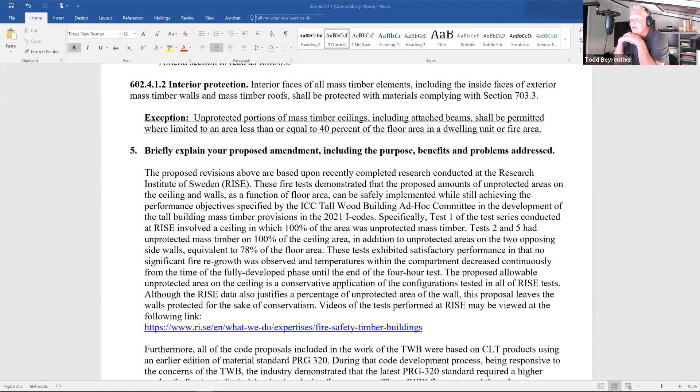May I ask the comment about what is in the testing and research that was done in Sweden? What remains in the report? Sure. Actually, in the report itself it mentions a list of items they're still looking into. If you allow me, I'll just pull that up.

But off the top of my head, they're looking at the impacts on exterior facade. There were a number of instances where there were still hot spots in the compartment fires, and they're still studying the impact of exposed ceiling potentially on the exterior facade. There is still work going on with firefighter operations and identifying where those hot spots, those smoldering areas, still are. Also how to address repairs in case there's a fire incident, how to make repairs on mass timber structural elements. There were also some additional questions that are still being worked on.

One thing I have a question on is in the test plan for the RISE tests, a number of the tests included 3 layers of gypsum wallboard, whereas the ATF lab tests overseen by the ad hoc committee only included 2 layers of gypsum wallboard. And of course the code requires a minimum of 2 layers to achieve the 80 minute rating. So there are also some questions about consistency and the ability to take those test results and compare them in terms of performance.

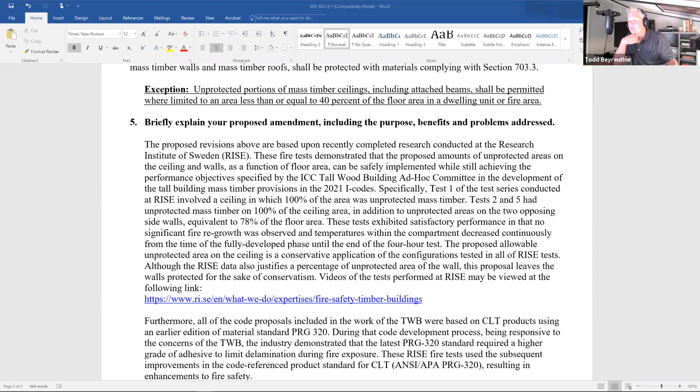Andrew, may I ask John or Sue or anyone, are these being proposed for 2024 also? Is this where this is coming from? Yes. Okay. Yeah, that's the, I think Shamim said that's proposal G146. Thank you.

I'll just make a statement. This was, on my understanding—I wasn't on the ad hoc, John was—but this was the whole point, to continue testing and making improvements as we go along. So it was conservative from the beginning, that was understood. And so this was always, in my understanding, planned.

Did you want to make a motion, Todd? I move to forward this as written to the BFB, please. Okay, is there a second? Second. Thank you, Sue. Any further discussion?

This is Chris. I think, well, if we're moving it forward as a full recommendation, I'll probably go no on it, just because I think it needs a little more look at. I wonder if it would be appropriate to tell the BFP that we see this as something being discussed at the national level, and perhaps it's appropriate to bring it early, but we probably want to wait to see how it shakes out at the national level, just because I don't have the time or resources to put in the work it deserves.

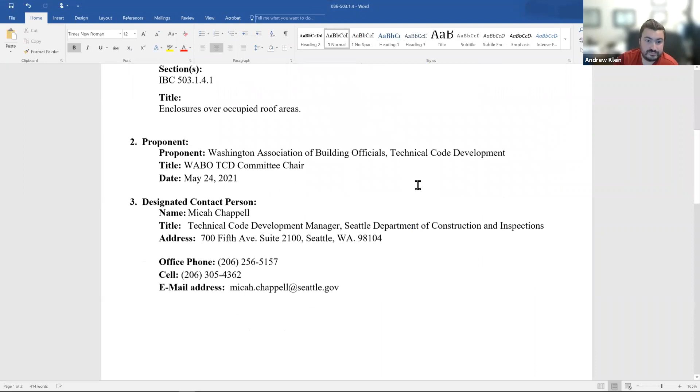Let's move on to 86. All right, again, another exception here: enclosures over occupied roof areas. Elements or structures enclosing occupied roof areas shall not extend more than 48 inches above the surface of the roof. Exception: penthouses and high-rise buildings.

John, or Sue, do you want to explain what the thinking is, or should we just read off here? Sure. The whole thing goes back to when occupied roofs got put into the code. There was a lot of negotiation to get something in like this. One of the things the fire service wanted was to be able to get off the roof in a hurry if needed, so they put a 48-inch limit on basically the parapet around the edge of the roof.

However, if you're in a high-rise building, you're beyond the reach of the ladder anyway. So the idea is to say if you're in a high-rise building, the 48 inches does not apply. This was put forward by the Building Code Advisory Council, and I believe it had the backing of the Fire Code Advisory Council as well.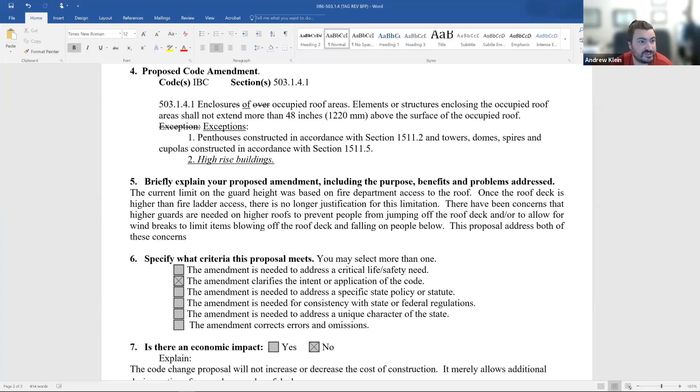Next, again, interior protection. Andrew, can we go back to 085? Yes, the one that I may have given you a wrong recommendation on. Go ahead, John will show you. John, can you show the summary?

It's a document, yes. So this is the summary we have on our website, based on the bylaws and the WAC, and the highlighted areas. The highlighted area at the bottom specifies that tag right there - keep it there. So the tag can recommend support of the proposal, recommend modifying the proposal, or recommend rejecting the proposal. And what Krista is telling me is that it's been going either way, so the tags haven't been consistent, and she suggested that for better clarity, we have another vote, as Andrew suggested, to reject the proposal, just to make it clear and avoid further complaints.

Okay, thank you, Stoyan. Let's go over this next proposal, and then we'll come back to that. I know concerns were brought up about the different types of type 4 construction, so it sounds like this goes along with it, and we'll vote on this, and then we'll go back to a vote on 85.

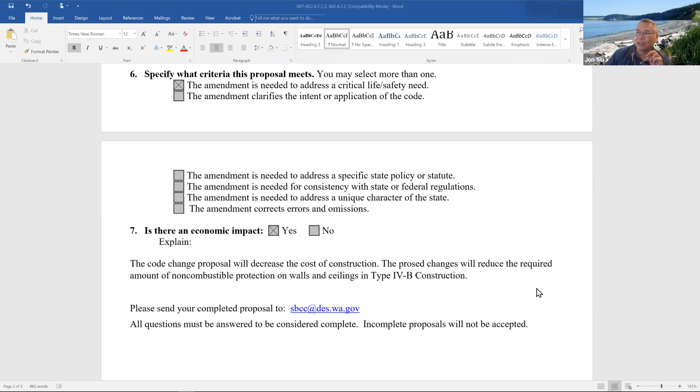But the other thing I do want to point out is, again, there's no magic to these numbers that are in the code right now. I think that's the big thing we need to remember - the magic is that that's what they were allowed to expose at the ATF tests back in the TWB days. So sorry, for those who weren't involved in those days, the Tallwood Building Committee was involved in helping develop these tests that were performed on a 2-story structure and various scenarios. And they tested it at the ATF, alcohol, tobacco, and firearms test facility in Maryland.

That particular facility had certain limits. They have a big hood over it to get rid of all the smoke and heat. There was some concern from the ATF folks that we'd be burning up their lab if we did it totally unprotected, so they protected a certain amount. They did some calculations on how much heat they thought was going to be released, and kept it under that number.

So these percentages were put in because that's what was actually tested, but again, I don't think there's any particular magic to them. I just want to emphasize that.

Thank you, John. I'd agree there was no magic. Things were put in very conservatively, and one reason to open this up a little more is that both of these proposals, 85 and 87, relate to the beauty of CLT - covering that up when it's not necessary takes away a lot of that beauty architecturally. I like both of these proposals personally, but I don't know if we want to take a straw poll if anyone's going to change their vote based on these two together. If not, there's probably no reason to discuss more if we're recommending disapproval of both.

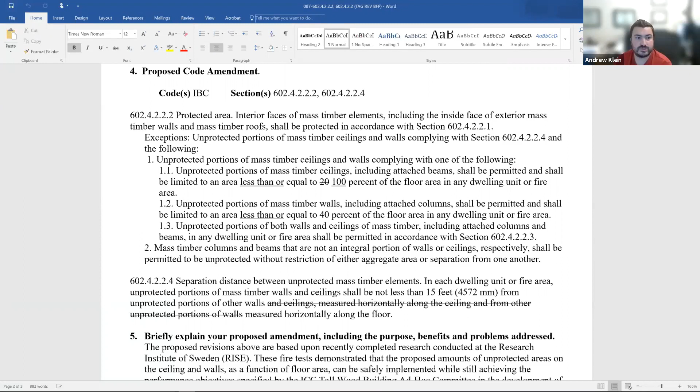All right, any more discussion for members of the public before I ask for a motion? Anyone want to make a motion? I'll move forward BFP as submitted. Thank you, Sue. Is there a second? I'll second, Todd. Thank you, Todd. Any further discussion? All those in favor, please say aye. Aye, aye, aye. All those opposed? Motion passes. So let's do 85 now.

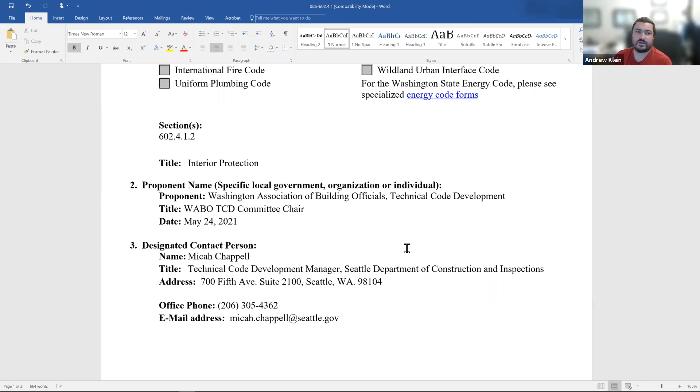So we took a motion to move forward as submitted, and that failed. So we can take another motion. This is Chris, I would move to not recommend this proposal to the BFP. So we'll send it forward recommending disapproval. Thank you, Chris. This is Corey, I'll second that. Thank you, Corey. Any discussion? All those in favor of the motion, please say aye. Aye, aye. All those opposed? Nay. Sue, you said no? Yeah, I said no. And Todd - so we've got two no's, Todd and Sue. Are there any other no's? Okay, I don't see a reason for a roll call then. So that motion passes to move it forward with disapproval.

Let's see, up next, 116. I think these are forms, let me see if I can pull it up. Okay, so this is an appendix P. Here's the actual proposed amendment - this is a brand new appendix they're proposing, construction and demo material management. Who was the proponent of this? Kinley and Eric - Eric was the second one, okay. Anyone familiar with this, or should we go through it together? All right, let's go through it together then.

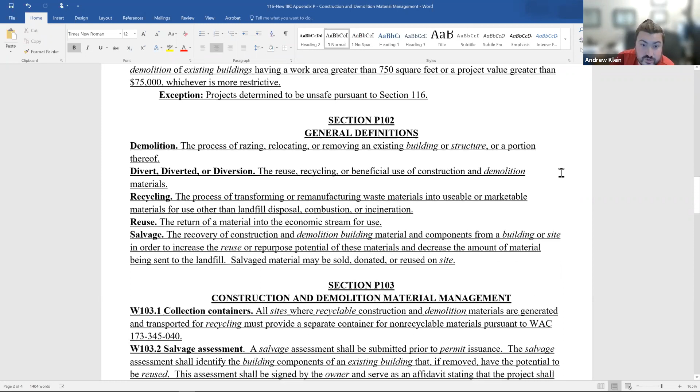So purpose of this code is to increase the reuse and recycling of construction and demo materials for any area greater than 750 square feet or project value greater than $75,000, whichever is more restrictive. There's some definitions there - demolition material management. Salvage assessment shall be submitted prior to permit issuance. Salvage assessment shall identify building components of an existing building that, if removed, have the potential to be reused. Waste diversion report - so it looks like a lot of this stuff is probably very similar to what you've got in some of the green codes, which are either options or requirements in 189.1.

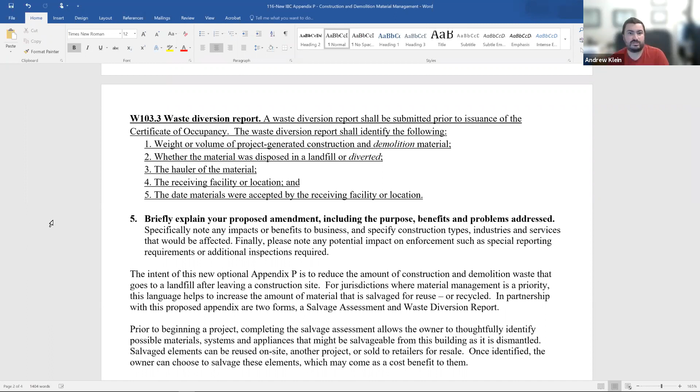Any discussion there? This would be an appendix. It would not be mandatory language, but it would provide guidance for a jurisdiction that wanted to adopt parts of green codes.

It's a new appendix, right? It's not existing, correct. It's a new appendix dealing only with... If the state adopts this, doesn't that make the state adopt the appendix, so it would apply? No, it needs to be clarified what the council is adopting. Some appendices are adopted at the state level, and the rest that are published in the code are available for local jurisdictions to adopt. So if we clarify what the adoption is for, I think it will be clear enough.

Okay, so we could do it either way. The proposal states that this is optional, that's the rationale for this proposal. It's not intended to be mandatory. So can a jurisdiction adopt a green code as mandatory, since that's above and beyond what we have in the state, or is that not permitted?

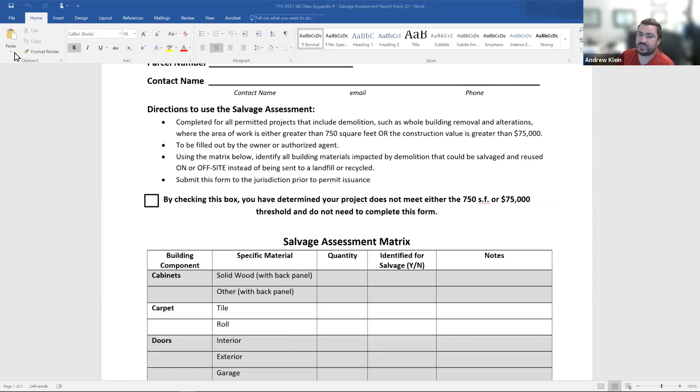Well, the green code is not adopted in the state. Some jurisdictions may adopt measures of green code. The approval of the council is required for residential, 1 and 2 family residential. So if a jurisdiction wants this type of guidance, they could adopt it. I know Richland, for example, has adopted the IGCC / 189.1, but it's not a mandatory requirement. But if a jurisdiction wants to put green provisions in, they could adopt a green code as a mandatory requirement, again if it's not specific to 1 and 2 family dwellings and multifamily.

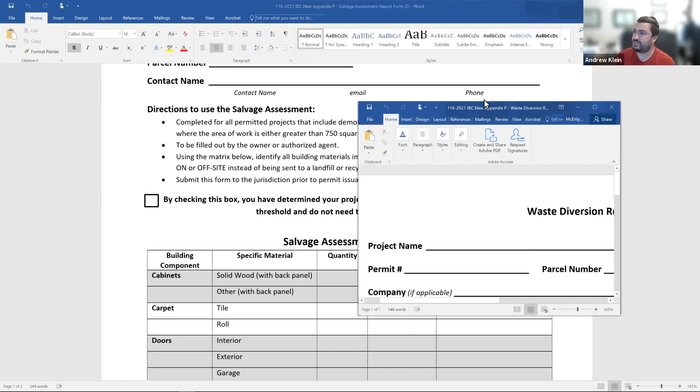Okay, that's my feeling, that info's out there. There's no reason for an appendix. I don't see what this adds, but yeah, it's open for discussion.

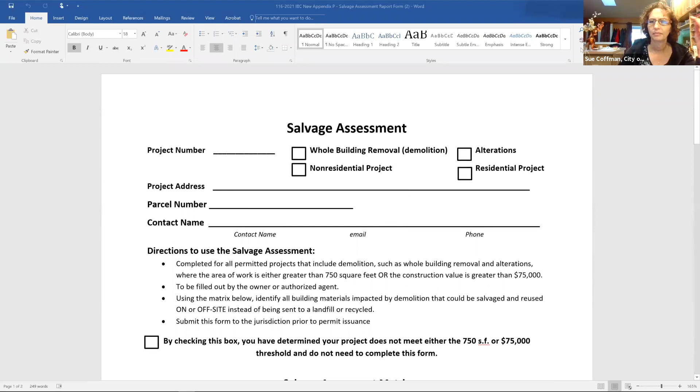So I guess my understanding, if this was forwarded through as optional, the state allows it as an optional appendix, it could be applied for residential. No, even if it's optional, if a local jurisdiction wants to adopt it for residential, there is a procedure they need to follow and submit it for approval by the council. But is that just for 1 and 2 family, or for the IBC? It doesn't include 1 and 2 family only, it includes multifamily as well.

While we are talking about this appendix, I can find the exact language and read it. Yeah, then what would be the point of us going through this process?

I actually support this, it's great that there's this language. But for some smaller jurisdictions, it may be way too hard, managing who's going to handle all this information. So that's another thing—it's okay to require it, but having to manage that information and make sure they're doing it seems kind of hard.

Adoption by the council is needed for single and multi-family buildings. Multi-family buildings in the RCW are defined as common wall residential buildings that consist of 4 or fewer units, that do not exceed 2 stories in height, that are less than 5,000 square feet in area, and that have a 1 hour fire resistive occupancy separation between units. This is in the RCW. So single family dwellings and multi-family buildings that meet this definition require approval by the council, but this doesn't apply to all other types of construction.

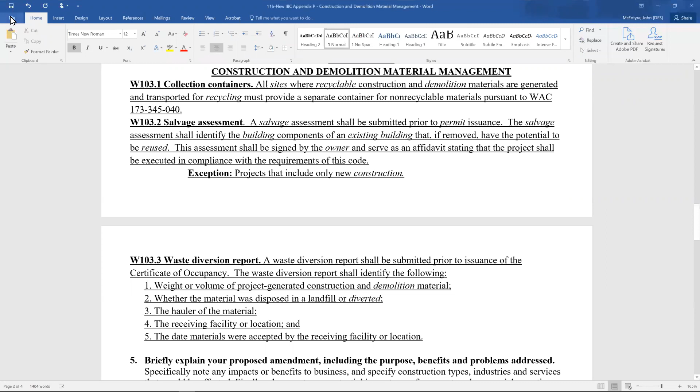Okay, thank you. Do we have a second? We might fail for lack of a second. I thought we had one other. I'll second it. Okay, thank you, Mike. Let's see, I'm debating, let's do a roll call vote, just in case, maybe people just weren't paying attention, or maybe people are opposed to it. We'll find out. So John, do you mind taking a roll call vote?

Sure. And this is for moving this as not a mandatory, but as an optional appendix, as submitted, moving it forward to BFP with that recommendation. All right. Sue Coffman, aye. Knew the answer, but Corey Thomas, no.

Chris Seaman, I'll abstain. And Todd Bayreuther? Todd, you still on? Yes, yeah, I'm fine sending it to committee, aye. Mike Barth, I'll say aye, it's no harm. And Al Spalding, aye.

So 4 yeses, 1 abstained, and 1 no. Perfect, all righty.